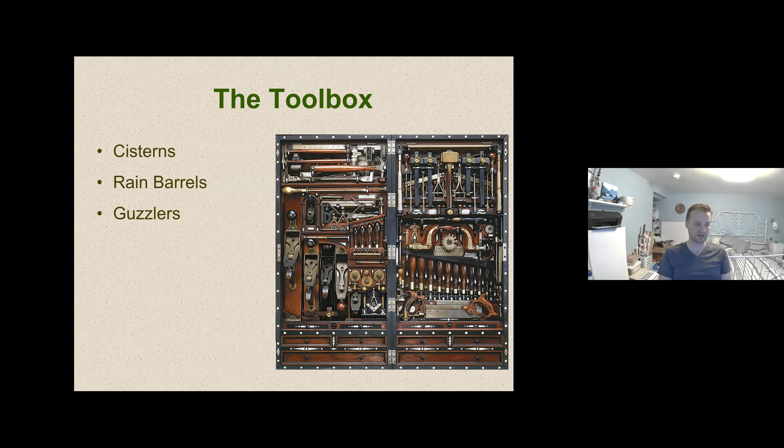So the things that we're mostly going to be talking about are the three most common types of rainwater harvesting systems: cisterns, rain barrels and guzzlers. So first, let's talk about why would you want to save the rain? Everybody's kind of got their own reasons for it. From the conservation district, our ultimate goal is to protect our drinking water and freshwater habitats. We're thinking really large, 30,000 feet scale, trying to protect our environment, get us into a system that's more sustainable, and stormwater harvesting can do a lot of that.

However, admittedly, most people are just trying to make their property work the best that they can, and they don't want to be using resources that they have to pay for. So alternatively, it can save you money. There is some upfront cost to rainwater harvesting, but it's one of those things where it pays itself out over time. So you kind of have to figure out what your initial investment capacity is, and then go from there. But it definitely can save you money over time. It just takes a little while to pay off.

One of the other better reasons to do stormwater harvesting is to put water in places where there isn't existing plumbing. This is most common for livestock. So that's what a guzzler is; we'll cover that in a bit. It's just an artificial roof that fills an existing cistern so that livestock can water when they're way out in the fields, and you don't want to bring a water line a mile or two out to where the livestock are. But there's other reasons to do that. In general, if there's a spot that needs water and you don't want to do a whole bunch of plumbing to get water out there, stormwater harvesting is an easy way to do that.

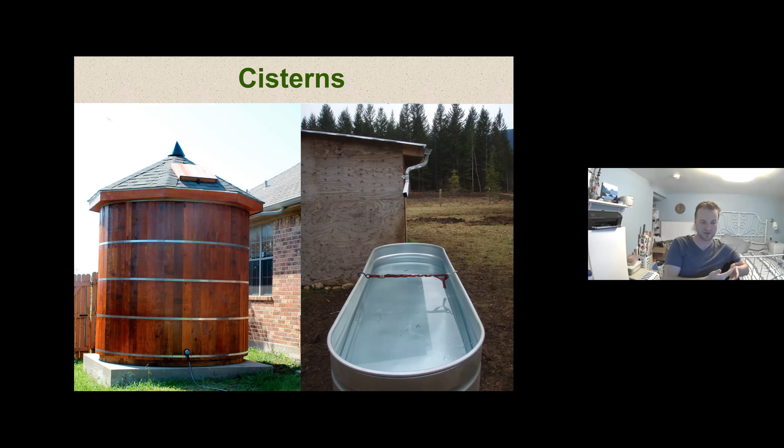So one of the things that we always do when we put in these systems is figure out a way to keep sunlight out of the water, because otherwise the whole thing just fills with algae. And you'll notice that with the rain barrels that we sell, we use recycled shipping barrels in order to do a rain barrel system. And we only use the blue ones. We never use the white ones because the white ones are semi-opaque and they let sunlight through. So you end up with algae blooms.

When it comes to cisterns, usually the first thing people ask me is, can I put it underground? And yes, you definitely can put it underground. People like the idea of putting it underground because it's out of sight, out of mind. However, you should know that putting it underground usually increases the cost by 3 or 4 times.

1, because you have to actually dig a hole. 2, because it has to be done in a way that won't collapse on itself because of the weight of the soil around it. And then 3, because then you have to use a pump in order to get the water out. If you use an above ground system, you can use gravity to get water to the places that you need it to go. But if you have a below ground system, you pretty much always have to have a pump, and that adds significantly to the cost of the system.

Hey, Derek, there's one question, and maybe we'll just address it right away. Somebody asked, from what I remember, we weren't allowed to have water catchment. Has that changed? What's the rule? Oh, yeah. Very good. Yeah, so this always comes up. And I'm glad it came up again. It's come up every year that I've done this presentation. So

Technically, the water that falls out of the sky belongs to the state. And up until 2009, you actually needed a water rights permit in order to collect stormwater. That is no longer true as of 2009. Now, as of 2009, you are allowed to collect as much water as you want, as long as it doesn't significantly impede the function of the water system.

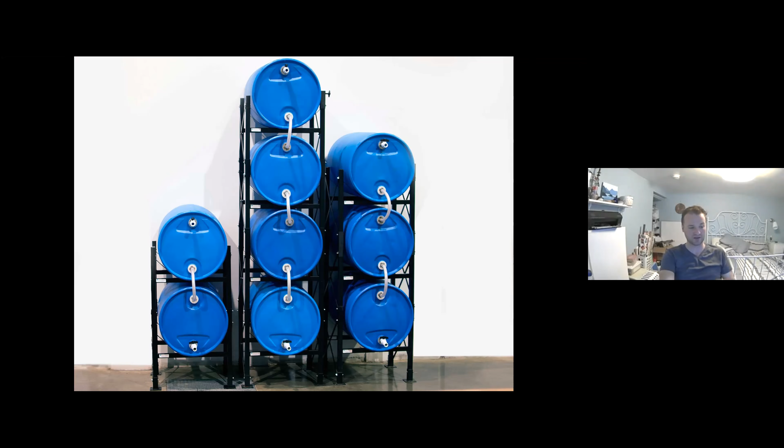Derek, will you go into attaching rain barrels at some point? Yes. We'll cover the details of that. So, more specifically, if you are going to put up some type of system, you have to figure out where the water goes now and how you're going to interrupt that. Most people put these systems on downspouts because it's really, really easy to just put the barrels or the cistern right up against the wall of your house.

And then most commonly, there's these accordion downspout things that stretch out and stretch in. And so you can connect that to the bottom of where your downspout comes out and then stretch it over using the accordion system and then put it down into your barrel. That's mostly what most people end up doing. If you use our rain barrel system, there's a lip around the top of the barrel, and we usually just have people cut their downspout at the same elevation of the barrel and then pull the downspout over the lip of that barrel so that it goes down into the barrel.

One other thing that you're going to have to figure out is how much water actually comes into the barrel system. And the thing is, especially in Western Washington, we get so much rain that a very small roof will produce a very large amount of water. So in theory, 1 inch of rain will collect about 550 gallons of water, which is 10 barrels of water in just one rain event of 1 inch.

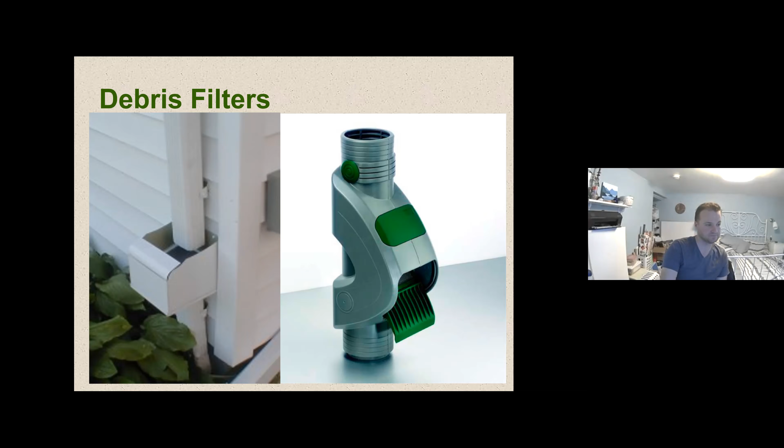UV disinfection is really common among stormwater harvesting, and that's come down in price a lot compared to what it used to be. All this stuff in general has come down a lot in price over the 10 years I've been making these presentations. So things that used to be beyond people in terms of what they could afford are starting to become more and more affordable, just because the technology's come along enough and we're better at producing these things.

It just does take some thought to design if you want to do a potable system.

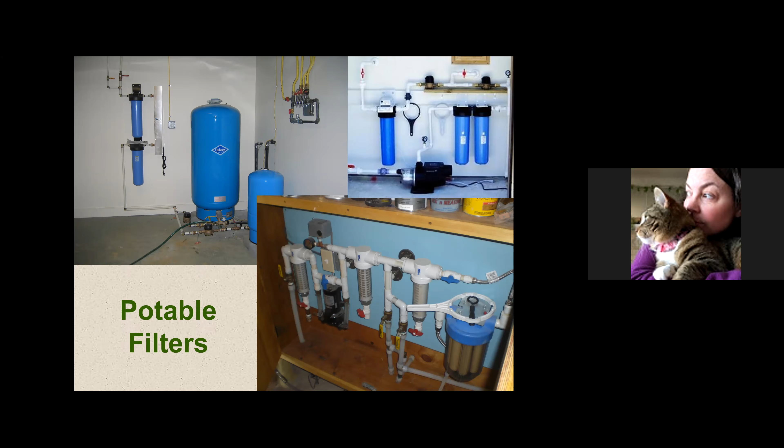There's a question about whether someone said the rain barrel with a wire top wasn't collecting any water. I have to think maybe it's just sitting in the middle of a field, because these barrels need to be connected to the house or to some sort of catchment, being a roof or what have you. Is that correct? Yeah, having an open barrel sitting out doesn't collect very much water at all. Ideally you would connect it to some type of roof, just because the surface area of an open barrel is very small, and there's just not that much water that falls through. So if you have something in an open field and you're not getting enough water in the system, you need to put some kind of guzzler or something on there in order to make it work.

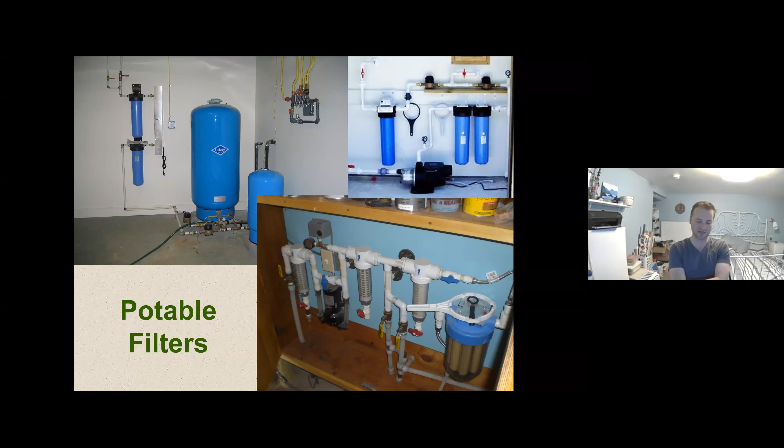Back to the filter thing, there's a guy located in Snohomish, Rainbank is the name of his company, and he specializes in these potable filter systems. He does the really large systems, and he works with people in the San Juans who have no option other than to use water that falls out of the sky for their entire water source. So there are people that specialize in designing these higher end filter systems.

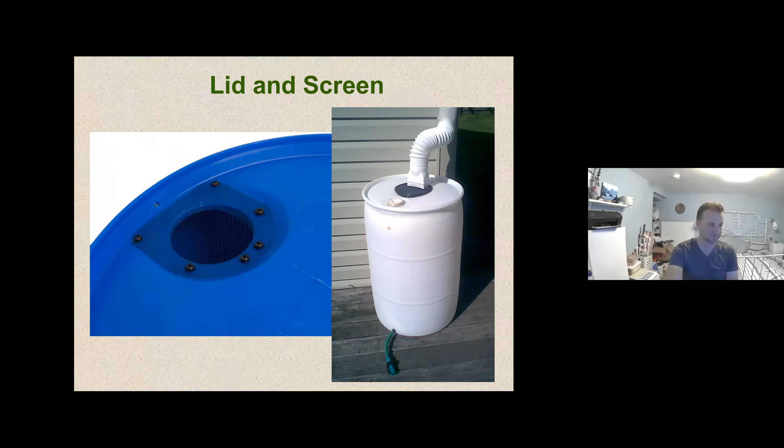Another question came in about where one could order for a reasonable price the larger plastic holding tanks you mentioned. They're called IBC totes, T-O-T-E. You usually have to do some Craigslist shopping. We have some sources we've found, so we have a fairly steady supply of about 60 or 70 a year, and we sell those to people that have really good applications for them.

The most consistent sources I've found have been distilleries, because they use them for pretty much all of their product and don't have a use for them, so they're pretty actively trying to get rid of them all the time. Any place that does food processing is going to have those too. So it's just getting on Craigslist, snooping around, doing some research, trying to find them. A good price on one is $50. A high price is anything over $100. If you're in the $75-$80 range, just do it, because you're probably not going to find much better than that. And ask a couple questions about what it was used for before you go pick it up.

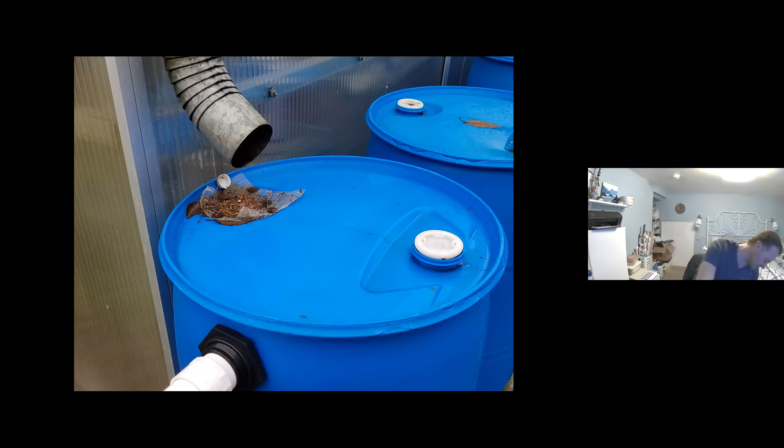There are becoming more and more places that are specializing in selling these types of recycled products, so you might be able to just find one if you do a Google search.

This is the filter on the system at Arlington High School. You can see it's just got some needles on top, so all I had to do was walk over and use my hand to brush that away, and then it was fine again. It wasn't flowing as well as it should have been, but I just showed up and it took me 20 seconds to clear it off.

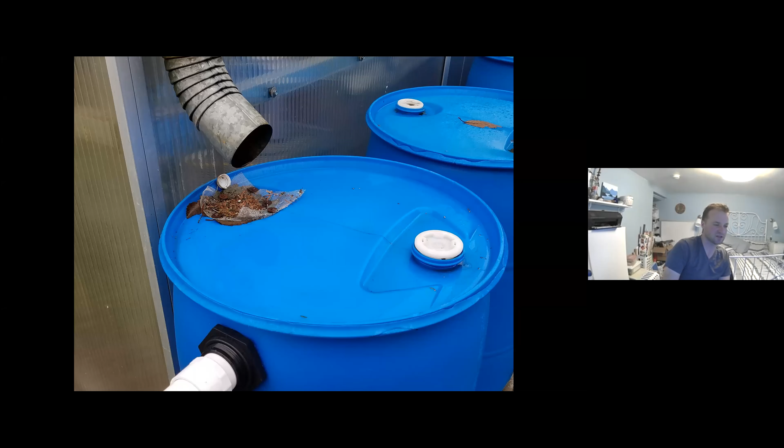You need a way of getting water out of the system. We like to use quarter turn ball valves with our system. Most valves are like a gate valve, where you have to keep turning and turning, and the reason that exists is because you're using a pressurized system. These systems are not pressurized, they're just gravity. So usually you don't need a gate valve of any kind, and it's much easier to just have a ball valve that you can turn on with a quarter turn and then turn back off again.

You have to figure out a way to perforate the bottom of these barrels. We have an entire system that we developed in order to do that, involving a pipe tap and a drill. There is a video online — if you just do a Google search for Snohomish rain barrel, it's the first one that comes up, and that will walk you all the way through the process of building your own rain barrel system.

Usually as part of this class, we actually have an event afterwards where we would have a bunch of you attending come to a class, and you would all learn how to build your own rain barrel. We couldn't do that this year, obviously, so I'm instead recommending that video.

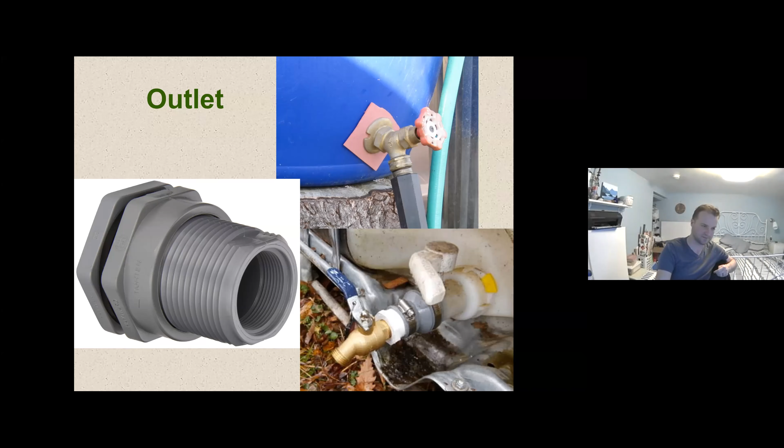One, does sunlight degrade plastic for the barrels? So what's the lifespan of a rain barrel? The ones that we use are 3/8 inch HDPE, which means they're pretty much bulletproof. I've found these barrels out in the woods that have clearly been there for 20 years, and they're just as sturdy as the day they were made. These are made out of some of the most resilient plastic ever, which is not a great thing for our environment, but if they already exist, you might as well use them for a more environmentally friendly way of doing it. There are some plastics that will degrade over time due to UV exposure. These are not those barrels.

The other question, when you're just talking about how do you get the water out, is Brian says, my valves freeze and break in the winter. What do you recommend?

So we're spoiled in Snohomish County in that we don't freeze hard enough to freeze an entire system usually. However, that's not to say that's true for everybody. The easy solution is to just empty your barrels in the winter and then start collecting water again in the spring when the rain starts. There's usually plenty of rain, even in most places, through the beginning of spring to fill these barrels up completely.

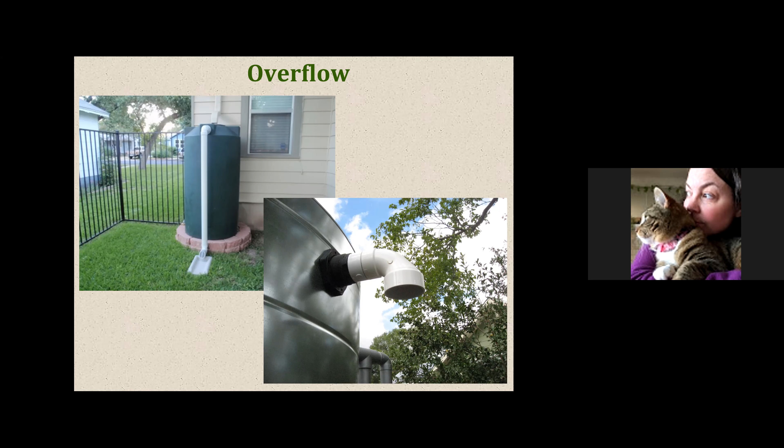Yeah, so you have to have a spigot at the bottom to get the stored water out. And then, in this picture, you can't see the spigot on the tank - it's probably over on the side somewhere. So you need a spigot on the bottom so that you can use the stored water, and then you need an overflow on the top so that any extra water can leave the system safely. So what I'm showing right now is the overflow on the top - the water can leave the system safely, and then you also need a spigot on the bottom to use the water.

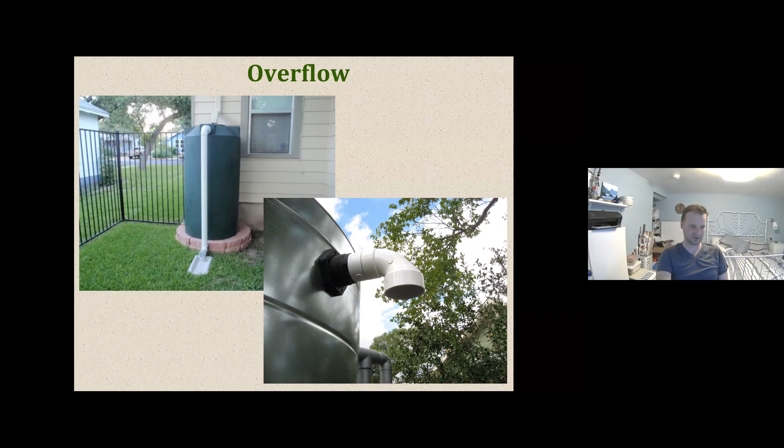We covered multi-containers already. We also have a video online, similar to the one on how to build one rain barrel, that'll show you how to hook a bunch of rain barrels together. If you do a Snohomish rain barrel search on YouTube, I think it's the second video that comes up.

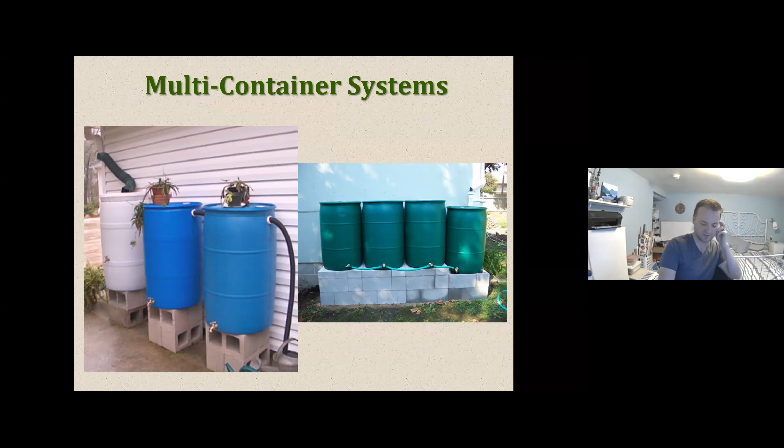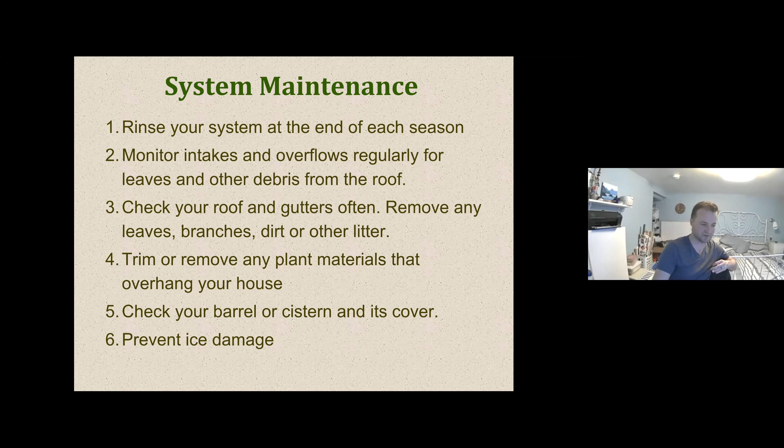We covered this already a little bit: system maintenance, rinsing your system, monitoring the inflows and outflows to make sure everything's flowing okay, maintaining your roof and gutters so you don't get debris in the tanks, trimming and removing plants that overhang your house, checking that everything's tight in terms of cover, and we talked about preventing ice damage already.

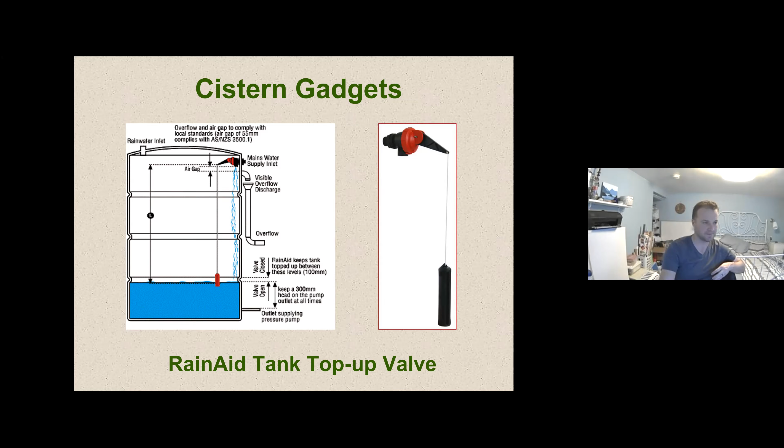If you are looking at doing some type of pump—because your house is located in a lower spot than where you want the water, or you're doing a below-ground tank, or you just want more pressure where you're using it—most commonly we use what's called a jet pump, or shallow well jet pump. It's a well pump designed to pull from fairly shallow wells, and that's basically what you're creating artificially when you put in a cistern: a shallow well on your property.

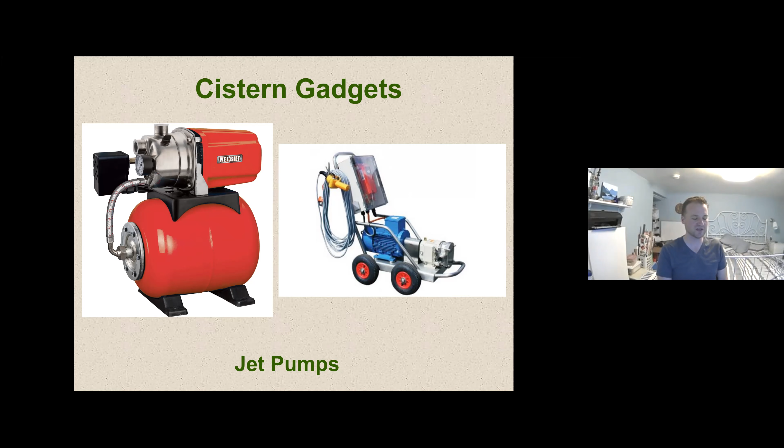These can be really nice systems that you can put on wheels. The whole thing's just contained. You can either run it off of gas or plug it in—they sell electric versions too—and just use it to move water all over your property.

This is a product we've had a lot of success with. I've been really happy with it, to the point that we've purchased probably 10 of these total and given or sold them at cost to different homeowners who put their systems in. It's a really simple sprinkler pump, made really well, and it comes with its own hose fittings and adapters already. You just connect one end to your tank, connect a hose to the other one, plug it in—it uses a standard 110 outlet—and turn it on, and it sprays water all over the place at a really good pressure. It's fairly inexpensive, I think it's like $150.

If you have some debris or leaves in the water, it'll pass through no problem—it won't plug anything up. It's really designed for farmers to pump out of great big ponds, so anything that would be in a pond, this can handle, which is pretty significant.

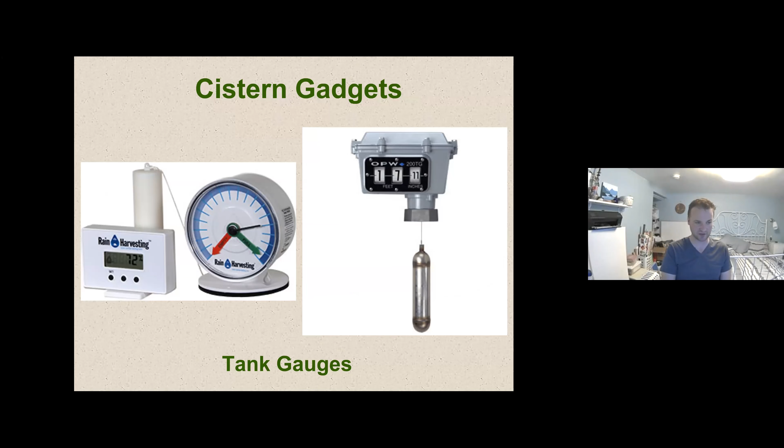There's a whole bunch of gauges available that will tell you how full your tank is. Most of them are pretty simple—just a float on the end with some numbers on top that tell you where the water level's at.

But they do sell these adjustable rate emitters called strawberries, and you just click them—they have a series of clicks, and you click until you get the drip rate you want, then leave it. It is a little fiddly; I used to have to come out every two weeks or so and adjust the rate, and sometimes it would get a bit of sediment in there, so I'd undo it, clean it out, and screw it back in. But it was a lot of fun to play with, and if you're the type of gardener that likes to be a little fiddly and dial things in, this is a fun way to do that.

So I had it just up on my deck. I just had a hose connection. I used a floor flange that I screwed up into the bottom of my gutter, and then had a garden hose that came down into the tank, and then from there I had the drip emitters that came out the side.